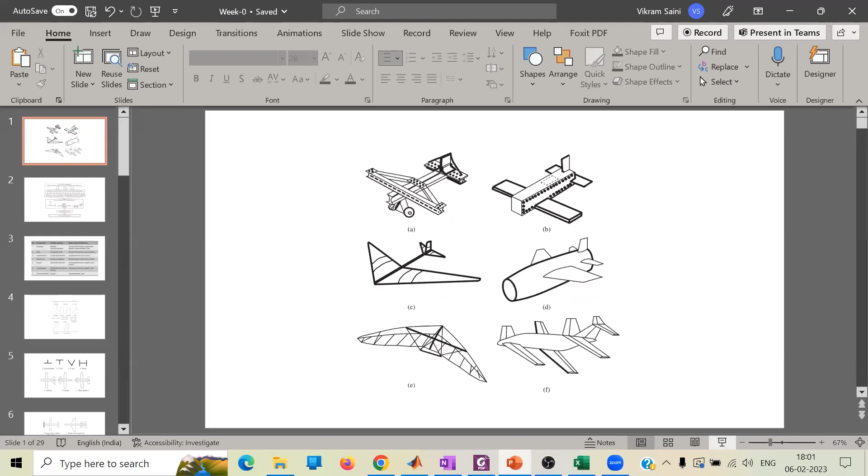So I think we should begin, we have enough people. All right, so you see 6 photographs, right? Now, can you tell me which aircraft was made by who? I mean, what is the main focus of a particular picture? Let's start thinking about picture A. Since it has to be an interactive session, I will ask you questions and you have to answer. Right, wrong, doesn't matter, because if you interact, you learn.

So any one of you, think about picture A. Who do you think made picture A, or the aircraft picture A?

Okay, so I'll give you some hint. There are multiple groups, let's say 6 groups. One is flight control group, aerodynamics group, propulsion group, manufacturing group, structural group, weight group. So now you have to choose which design is made by which group.

Let's begin with A again. Maybe structural. Okay, anybody else?

What's your name? Ripinder Singh, sir. Okay. And you are from? I'm from Amity University. Which one? Noida, Gurgaon, where? Noida. Noida. Great. And you will be surprised, I am also from Amity in my BTech. Oh, yeah, that's very nice. I'm also doing BTech in aerospace engineering here only.

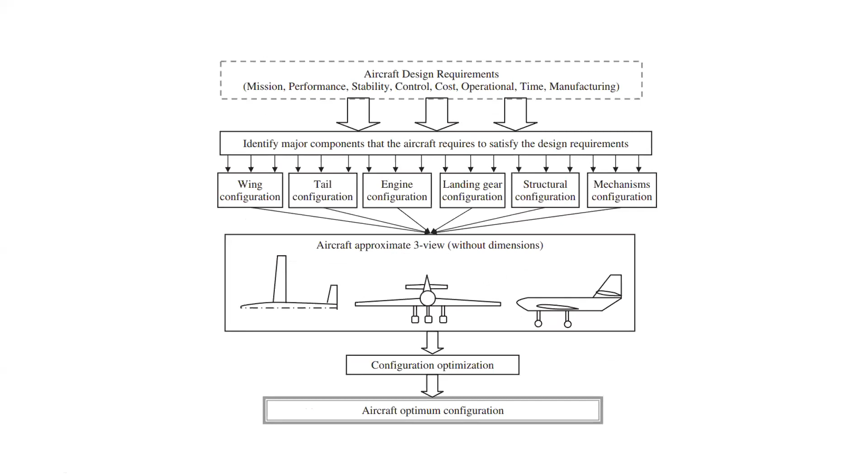This diagram gives you the sequence of how aircraft design happens. So what's the procedure? Your customer could be maybe an airline or maybe some government. They need some aircraft, so you are specified some requirements. You have a particular mission. You want this mission to have certain performance - your aircraft must have certain performance while executing this mission.

And I want to understand from you people, what is the performance of an aircraft? What do you care about in performance? You're free to answer, anyone. What do we mean by performance of an aircraft?

Basically efficiency and the power and transmission stuff. Power and transmission stuff - so you're more focused on the propulsion side, right? Yeah, correct. Right, anybody else?

Like about the mission profile - how much distance it can take off and land, how much loiter it can do, the cruising, maximizing endurance of the aircraft. Right.

So you said - I think this answer is more closer to what you will be learning in this course. In this course, performance of an aircraft actually means how fast you can climb, the climb rate of the aircraft, right? What is the range of the aircraft? What is the endurance of the aircraft? Okay, so these are the characteristics we care about in performance here.

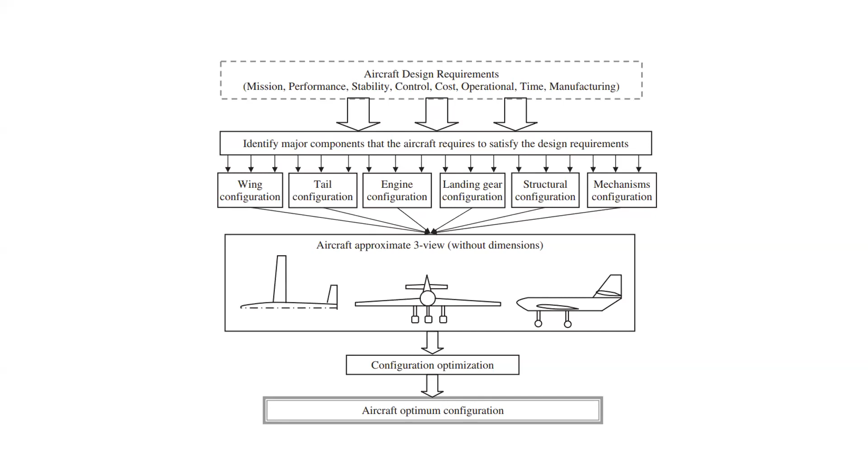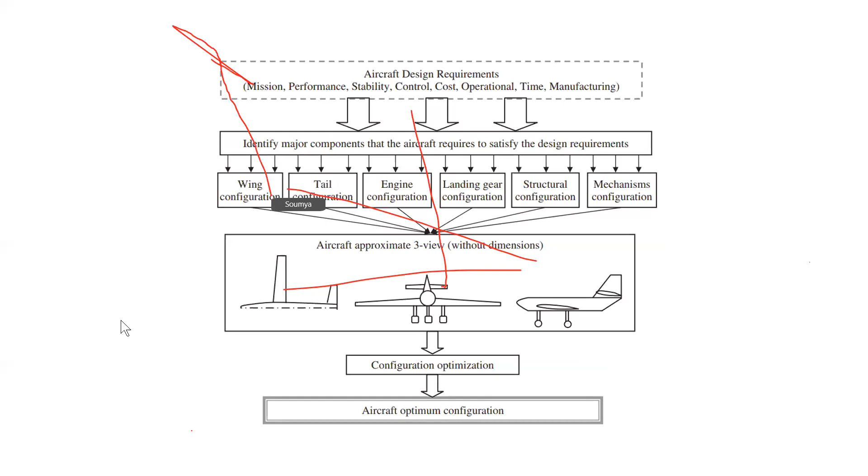We can see your name, Soumya. I mean...

So now you're allowed to write, but then you have to remove these things. Mistakenly written, sorry sir. You have to undo all of this, because this lecture is being recorded, it will go to YouTube. Yeah, we'll upload this, and I think you should undo all of what you did. You have an option in your Zoom, I believe. Please do it quickly, because time is passing and people will be unhappy when they see it. Yeah, someone has raised hand.

All right, so let's move ahead. I don't think he's able to do this.

Now, this is the next requirement we are given: the operational environment. What kind of operational environment will the aircraft be operating in? Let's say you want to make an aircraft for an aircraft carrier. So your aircraft sits on the aircraft carrier most of the time, experiencing more moisture because it's in the ocean. So you want the material properties to sustain that.

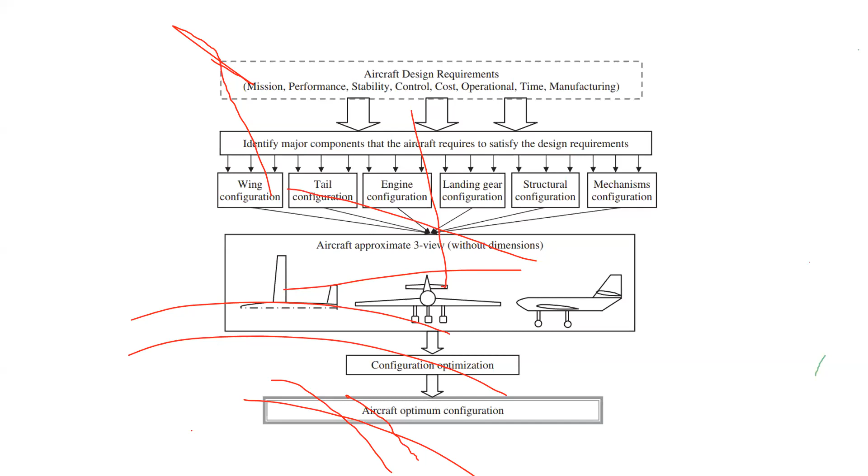So now we will move ahead to the next slide. Oh boy, I think you guys have to remove these things because they will be on every slide. The one who did this can only erase it. Exactly, that's what I know. So Soumya, you have to undo whatever you did to this screen, because it will be for all the slides. That's not a good idea. Yes sir, I am trying, sir.

There's an option for undo, Soumya. Yes, sir.

Okay, so we can keep talking. Now, we must understand the functions of different components, because as a designer, you're choosing properties of those components. You should know their functions and the impact of different components on the properties of the aircraft. So we begin with the fuselage.

You cannot have an arbitrary size of the fuselage. You want the fuselage to have a certain size based on how much payload you want to accommodate. You cannot choose very large, you cannot choose very small. You want to choose it such that you can accommodate the payload available to you.

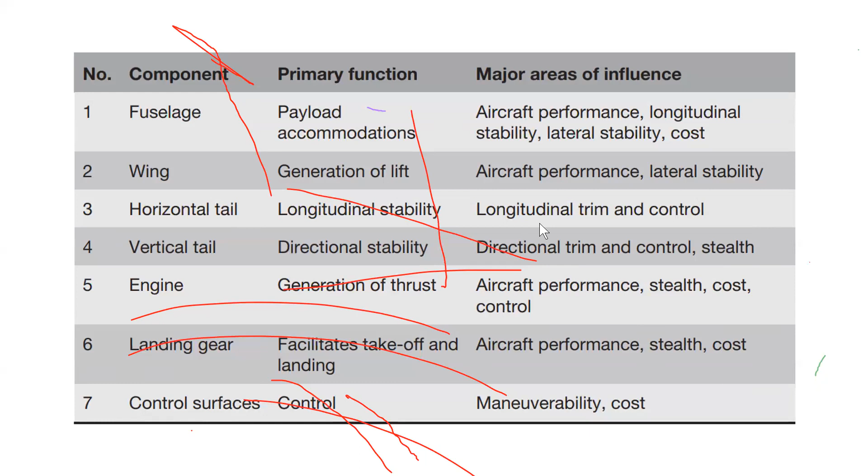During the course, Ghosh sir will teach you how high wing is useful, what are the disadvantages of mid wing, why you should not go with low wing in certain cases. I'll give you some very brief idea, not a detailed idea. You'll get these ideas throughout the course. My job is to introduce you to certain configurations.

Now let's look at the high wing. Can anybody tell me what is the advantage of a high wing? Any advantage? We'll talk about disadvantages also, but let's focus on some advantage of a high wing aircraft.

A student suggests it gives more stability. Yes, more stable, sir, it will make the aircraft more stable, right? Yes, sir. Okay, now you know, for a certain class of aircraft, the cargo aircraft...

When you load and unload cargo, your loading truck might need to move below the aircraft wing also. So for high wing aircraft, there won't be a collision between the wing and the loading truck. So there is an advantage for cargo aircraft, and you will find that most cargo aircraft are high wing. These kinds of advantages and disadvantages guide you on what kind of configuration you want to choose.

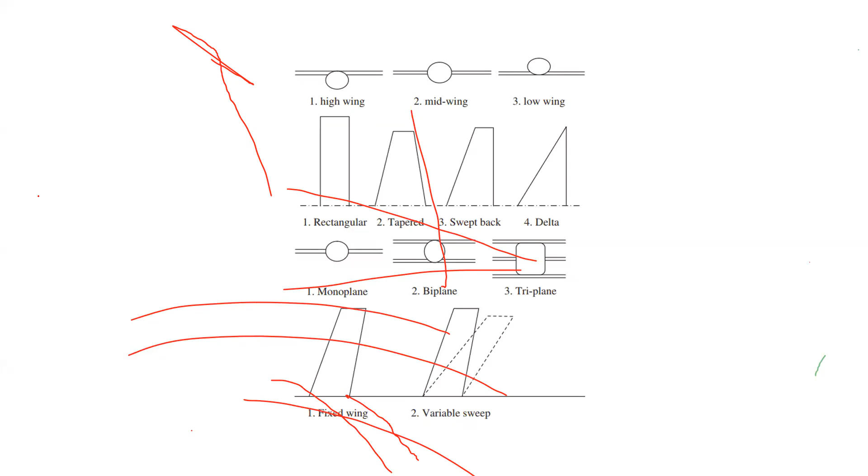The tapered wing can produce more lift compared to rectangular wings. Now, the aspect ratio formula is B squared divided by S. Tell me, how can a tapered wing have more aspect ratio for the same wingspan?

As we go from the root to the tip, the chord keeps decreasing, which will decrease the S and hence increase the aspect ratio. You can see this in the formula: for the tapered wing, you have less area for the same wingspan, and that's why you have more aspect ratio.

And if you have more aspect ratio, what are the advantages of that? The tapered wing can produce more lift compared to rectangular wing. And why is that? Rohan is answering in the chat, and the answer is really good.

Less induced drag for the high aspect ratio, that's good. Another answer is shock formation: the swept back wing is used to avoid shock formation, and the same goes for the delta wing. You'll find that fighter aircraft flying close to supersonic or supersonic speeds have delta wings or swept back wings to avoid shock formation on the leading edge.

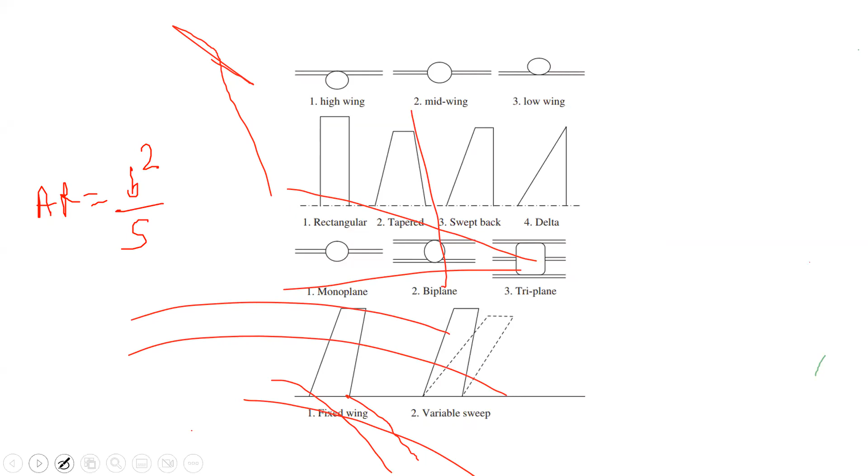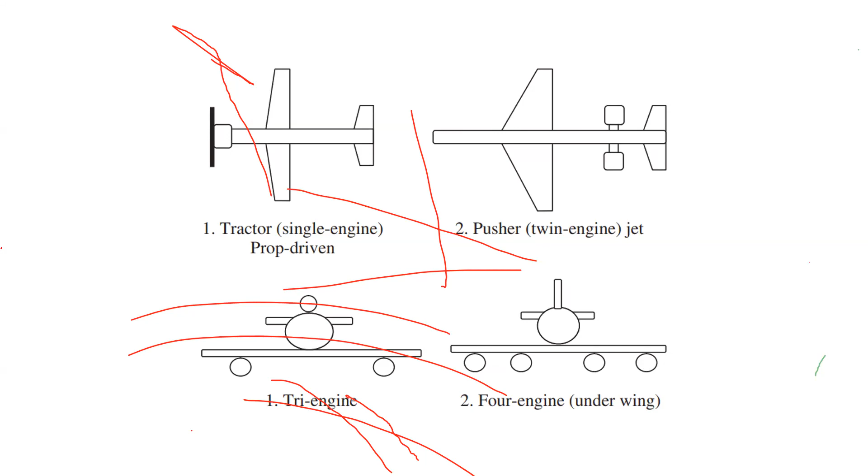This slide gives you where do you mount the engine. You have a tractor configuration, a pusher configuration, tri-engine, four-engine. Now the question is why would you go with one, which one? That's answered best by having a requirements table. As a student of aircraft design, your job is to understand various possibilities, and my job in showing these slides is exactly that - you should know the possibilities and their advantages and disadvantages. So these are different possibilities for us.

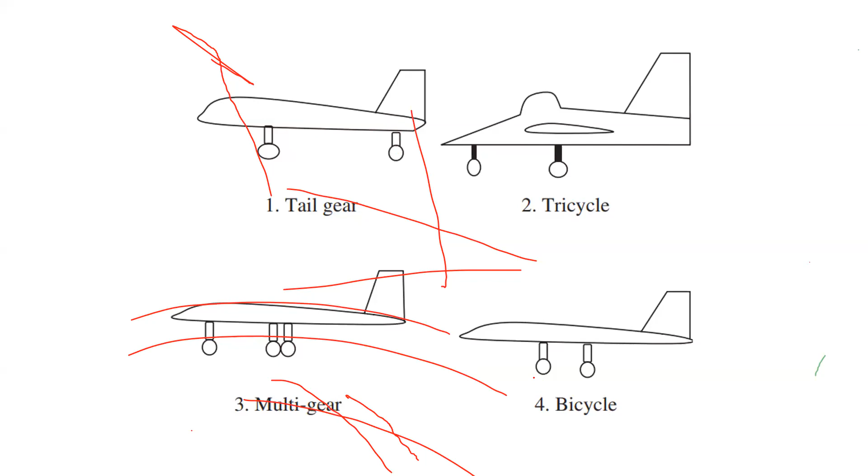There are possibilities for the landing gear. You can have a tail gear, where one of the wheels is right below the tail. It's a tricycle configuration usually in fighter aircraft. It's a multi-gear when the aircraft is very large. It's a bicycle configuration for lightweight aircraft.

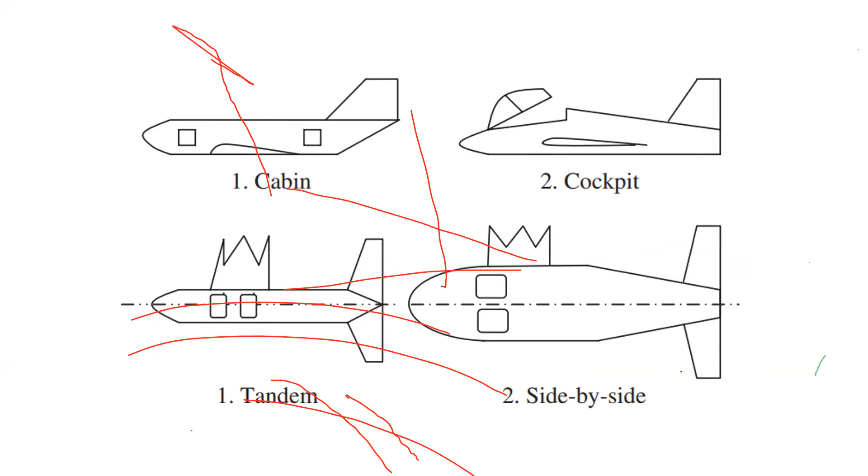Now, what is important to a designer? The designer could belong to military or large civil transport aircraft, small general aviation aircraft, or you're making something at home. So what is important to you? It drives your design decisions, right?

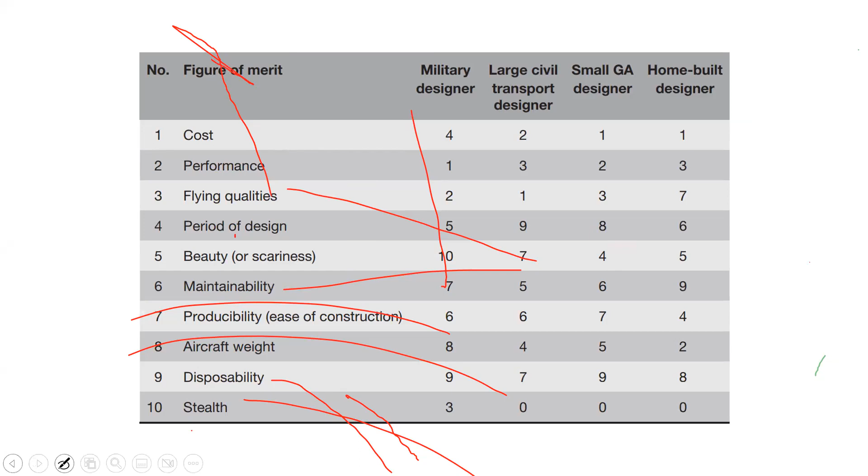This decision is driven by a figure of merit list. You make a list and make a decision on what you want in your aircraft. Let's move ahead.

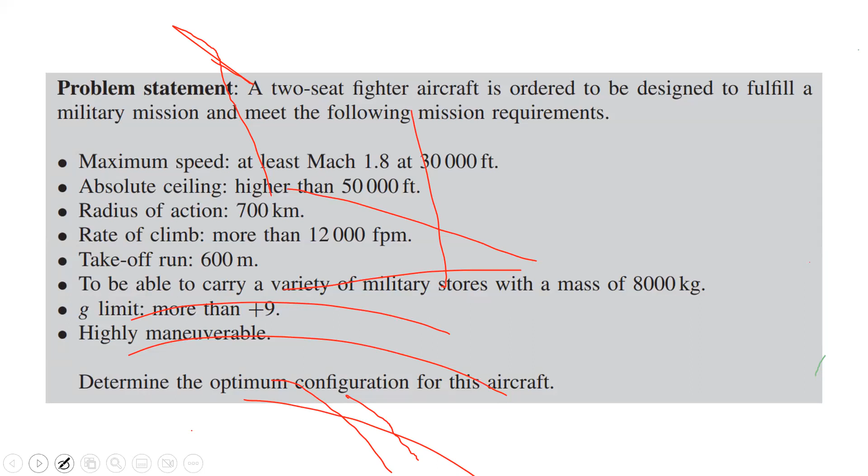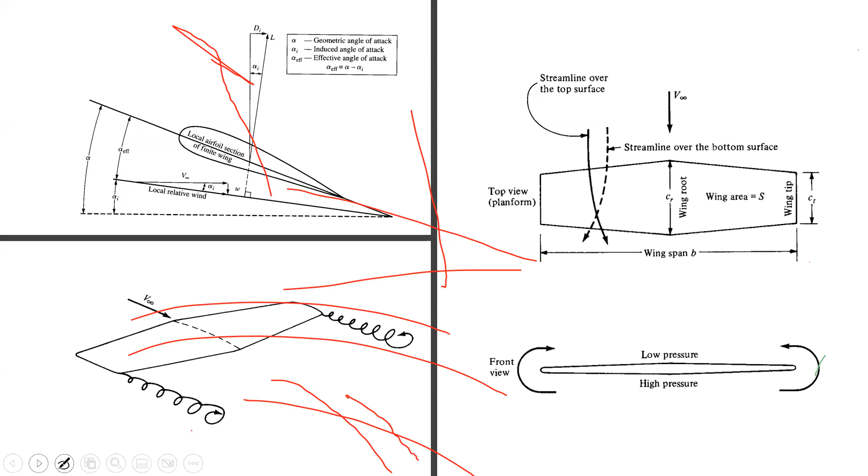Now, I'm not going to end here with this question. I need explanation. So what is an altimeter? You know the altimeter measures the altitude, but the question is, how does it function? How do you compute altitude from an altimeter?

Sir, I can tell about the old type of altimeters, how they work. Go ahead. So we have an opening which is in a pitot tube only, which measures the static pressure only. So as we go up in altitude, the static pressure decreases, which will show us how much altitude we have gained. Right. Basically, people in chat are saying atmospheric pressure, pressure difference in altitude.

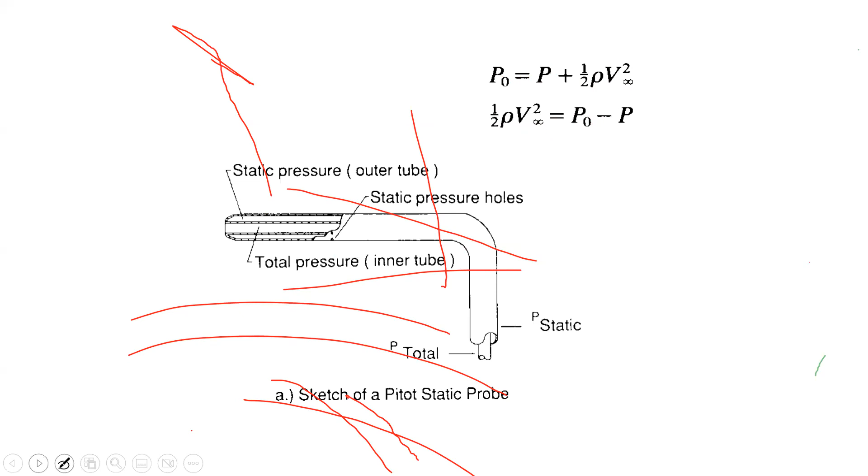Now, how about the altimeter? This is how the altimeter functions. The altimeter is a sensitive pressure transducer that measures the ambient static pressure and displays an altitude value on the instrument dial. The altimeter is calibrated using the standard atmosphere. You have to underline this: the altimeter is calibrated using the standard atmosphere.

Now, when you come back to this equation, your aim is to find out H. And what do we mean by calibration here? To find out an H1 and a T1. So when the aircraft is on the ground, you are at a certain height from sea level, so that is your H1. Before taking off the aircraft, depending on what kind of area you are in, you have to find out the T at a certain height H. That's how you calibrate it.

Then, since you are sitting in the aircraft, you know the current pressure, the static pressure. So by taking logarithm of this equation, you come down from the exponential and you can compute H. So this is how the altimeter gives the altitude.

And just for your curiosity, how do you derive this equation? Anybody have any answer? How do you derive this equation? Okay, that's an exercise you should go ahead and do to find out this equation. The only hint I will give you is that you find out the pressure gradient. You make a column of the air, then take a height differential dH, and corresponding to that, compute a dP, and then perform the integration on that equation. So you will end up with this equation.

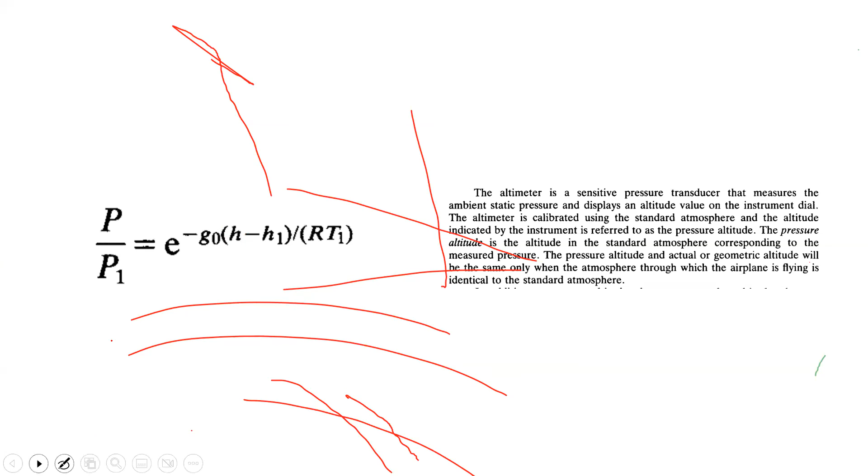All right, the next question is: weight is given for the aircraft, lift to drag ratio is also given, speed of the aircraft is given, and they're asking us to compute the power in kilowatts. I expect that you guys perform this question right now, sitting at your home. Just bring your calculator and start computing it. I'll go to the next question when I see answers in the chat. Go ahead and do the calculations, I'll wait for answers. I'm looking at the chat and let's see who answers first.

Rohan has answered 32.7, almost every question. Rohan, where are you from? I'm from Bangalore. And what are you studying? Actually, I am a pilot, so I probably know many of these things. So you're doing your BTech, or just studying this course for curiosity? Just for curiosity. Nice to meet you, Rohan. You're answering almost every question, so I'm impressed with that.

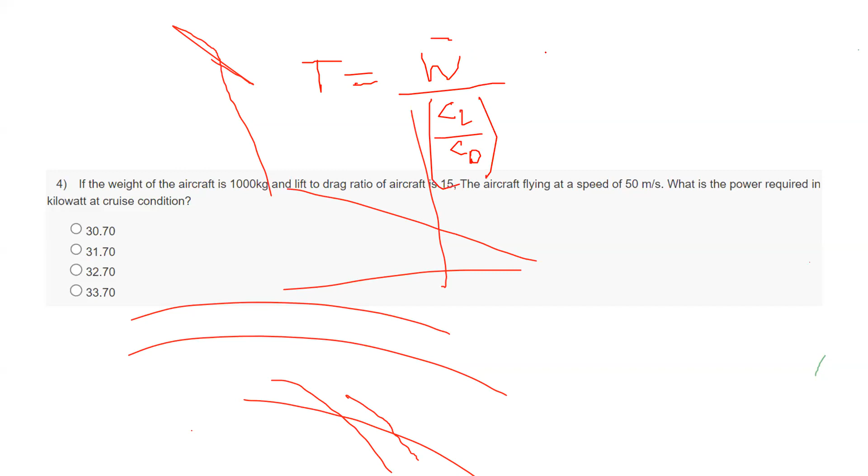So you find out the thrust. You first compute the weight of the aircraft and divide it with the ratio of CL over CD. This ratio is given to you, and the weight of the aircraft is basically: you have 1000 kilogram of aircraft and 9.8 is the G. You divide it with 15, that's your weight, and multiply this number with the velocity, because T times V infinity, this is your power. Multiply this with 50, and since you need the power in kilowatts, you divide, and it is 32.7. So the correct answer is 32.7, and this is the procedure. Power is velocity times the thrust. This is how you compute the thrust, and this is the calculation shown here. I think we are good to go ahead.

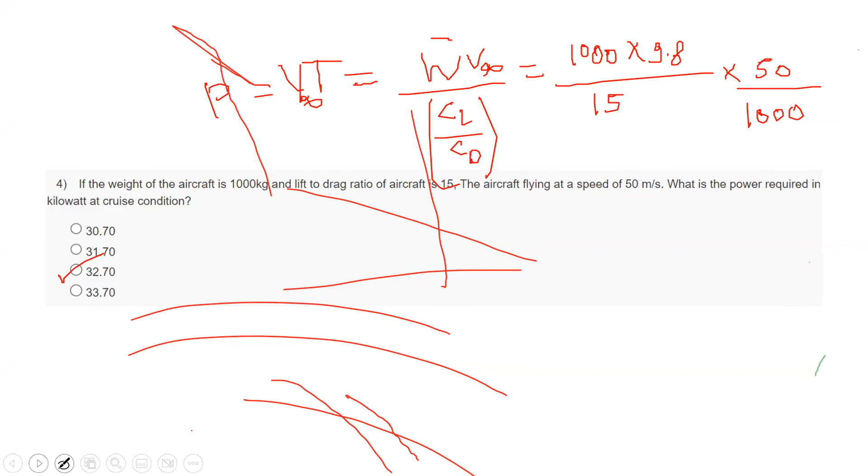Next question: the stability producing component for aircraft is? Aircraft tail. Yes, people are saying tail. Yes, it's tail.

To everybody who has answered tail, I want you to speak why not wing. You have to give me any reason, otherwise I won't accept the answer. Why not wing? It's mainly lift producing.

Akhileshwar Munisi is saying it's mainly lift producing. So does that mean it cannot have any effect on stability? Does it have a stabilizing impact or destabilizing impact on the overall roll stability? Wing has an impact on roll stability, that's guaranteed. But it has an impact on longitudinal stability also.

No. Ailerons are for roll control, not stability. Stability is different from control, you will understand this in detail sometime later. Akhileshwar has answered it has ailerons for roll stability - no, that's not the correct answer. Ailerons are to control the roll angle, not to provide the roll stability. Stability is a different concept from control, and you have to understand it very fundamentally.

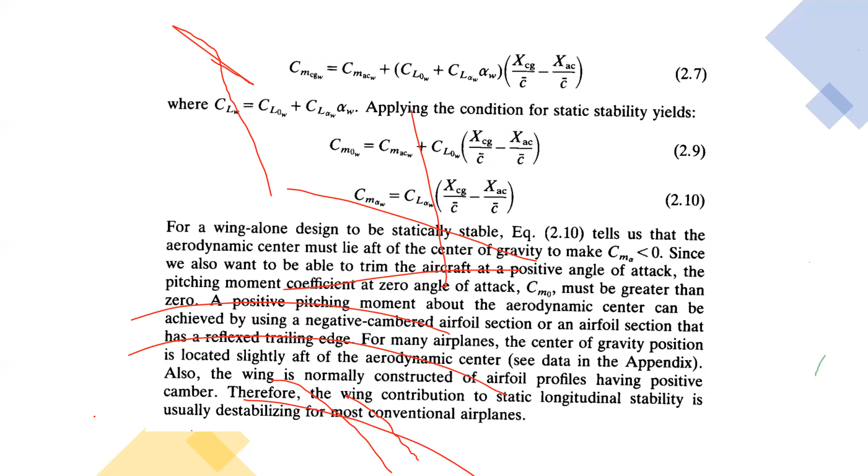So that's the full answer. Why not wing? You can have a wing-alone configuration that is also stable, but for that you need some arrangement with respect to the airfoil that you choose.

And this is the contribution of the tail, right? So Cm naught is positive for the tail in equation 2.27. All you have to do is arrange the tail setting angle IT, right? Because it's minus here, so you can reduce it as far as possible. IT, you make it close to 0, then the whole thing is positive. VH is horizontal tail volume ratio - you'll see the definitions of these quantities later on.

And Cm alpha contribution from the tail is also negative, so tail is a stabilizing component here. Since I'm showing you quantities you might not have heard of, don't bother - I'm just giving you some philosophical ideas here. All of these calculations you will perform later on in the course. So if you have not gone through a flight stability course, don't bother much, just hear what we're discussing.

Which book is this from? It's from Nelson, Robert C. Nelson. The book's name is Flight Stability and Control of, I think, Airplanes. You just Google Robert C. Nelson, I'll type it in the chat.

Let me type it, it's a good book. I recommend all of you study this book before you come to this course, because here Ghosh sir won't be teaching you the fundamentals - you have to know the fundamentals already. He will teach you the design philosophy, that's different. He'll directly start speaking about connections between, like if you change this, this happens, but you have no idea why that is true. So it's your duty to go through an aircraft performance course or flight stability course - both of those courses are a must for you to perform really good in this course.

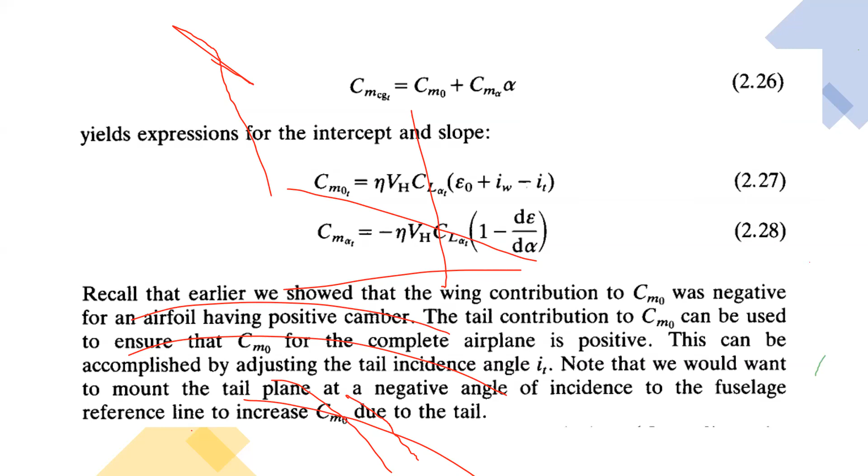Okay, so we now move ahead. If the weight of the aircraft is given and lift to drag ratio is given, thrust required has been asked. We have already done this question - when we computed the power, we computed thrust also. So this question is straightforward, everybody can answer, so nobody is left. I will move ahead directly without explaining anything here, and you can compute which one is the answer - I won't tell.

Okay, if aircraft is in static equilibrium, it means what? Are controls set to 0? Are controls not set to 0? May or may not be set to 0. None of these.

Somebody has answered something - A, controls are set to 0. Rohan is saying, I think it is sir, C, or may not be set to 0. Some people are saying C, some people are saying A. So there is a conflict - it could be A, it could be C. So I want to hear first from the group which has answered A. People who are thinking the answer is A, please go ahead and give us the explanation - why do you think so?

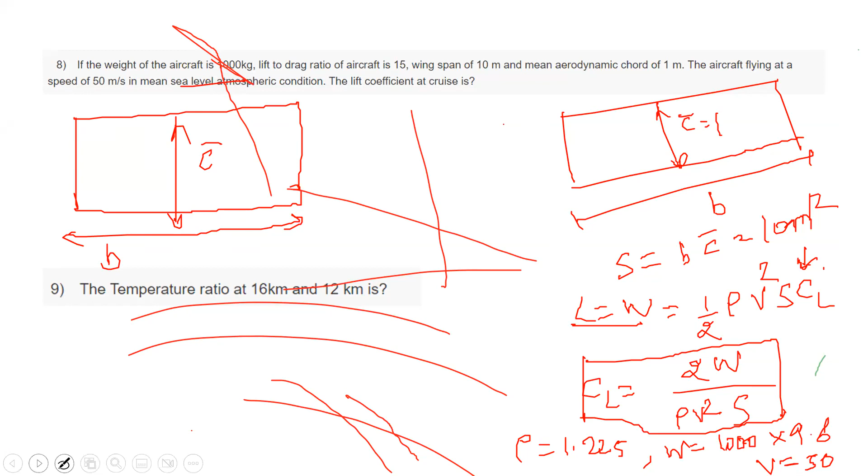Yeah, you read the question and answer. I'm looking at the chat, and then we'll discuss when everybody answers.

Akhileshwar has said 1, greater than 1. Yes, it should be greater than 1. Should be greater than 1.

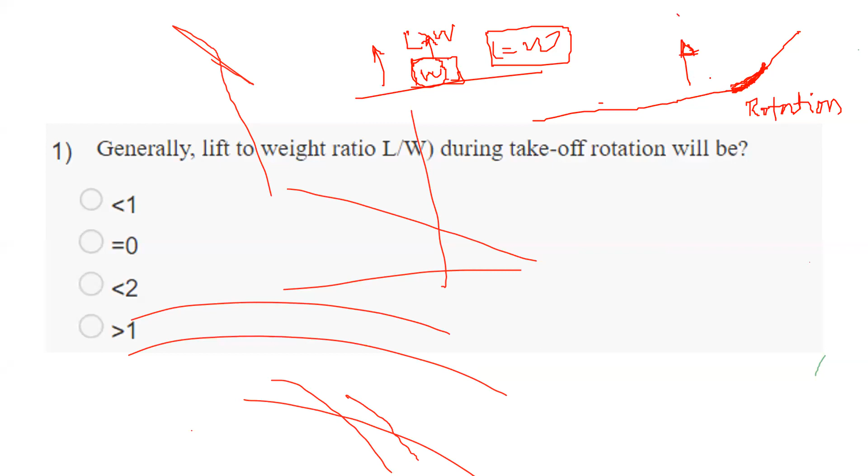You have to supply a lift force greater than W. That's how you accelerate upwards. Now, when the aircraft is climbing, it's definitely in an upward acceleration. It's going upward, right? It's going horizontally forward also, but it's going upward. There is a climb involved, so there is an acceleration involved in the upward direction. Therefore, lift is greater than weight during this rotation, and that's why the answer is D. Okay, sir, clarified.

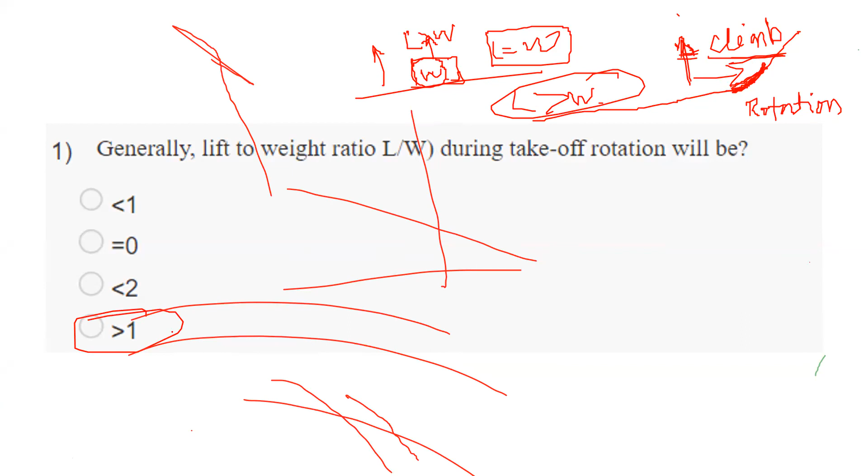Next question is this. So it's a big question. Note down the data. Everything, note down in your notebook because there are questions 2 to 6. They're based on this data. So you can refer to it in your notebook. Just write down, first information you have to write down is the value of the CD.

Then lift curve slope of the wing is 0.1 per degree. And zero lift angle is -1 degree, which means it's a cambered airfoil in the wing that you're using, and stall angle is 17 degree. All right, just write down this information in your notebook so that you can directly refer to it. I don't have to change the slides for that. All right, if you have written it, now we come to the question.

The lift to drag ratio, also called aerodynamic efficiency, at minimum power condition will be what? So they're asking, what will be the lift to drag ratio at minimum power, minimum P? That is the question. I'll first wait for everybody, and then if you don't answer, I'll answer.

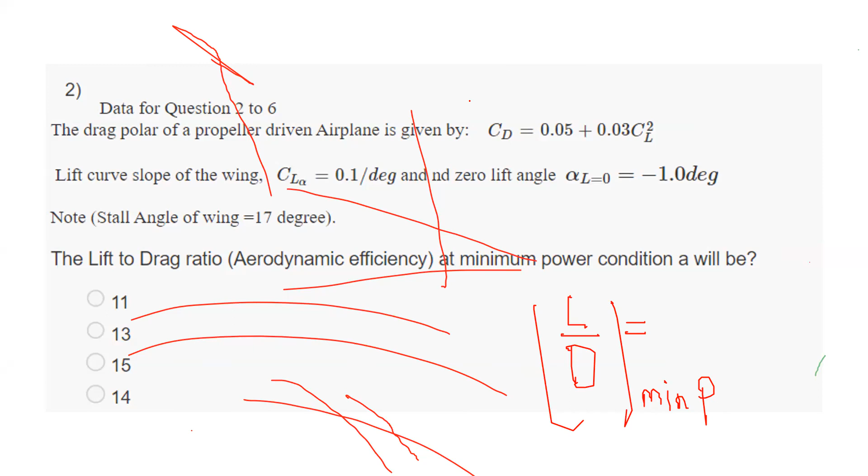Yeah, this is correct, man. Why didn't you tell us earlier?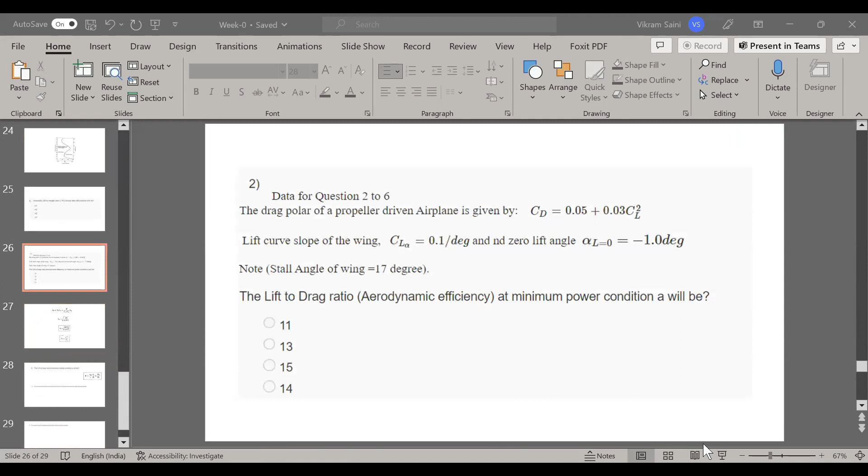Yes sir, now I got it. Sir, it's 11, coming out 11. Yes, it's 11, it has to be 11. Can you see the lines are not there anymore, right? Yes sir, the lines are not there now, they have gone. We should have done it earlier. No problem, from next time we'll be careful.

Anybody who has not got the answer, like who is confused about how the calculations will be done? Sir, me. Yeah, for you, we'll solve the question.

So the number one question you should be asking is, what is the minimum power condition? For that, you need the formula for power. Power is computed like this - this is thrust, this is velocity. Thrust is computed from the weight and this CL over CD ratio multiplied by velocity. Then velocity is computed from the formula for lift and weight. You substitute velocity here, you get the required power like this, and you find out...

This is... I think there is some mistake here. Yeah, it's fine, it's fine. So required power is proportional to this number. So if you want to minimize power, you have to minimize this number, CL to the power 3 by 2 over CD. Now, how can you do that?

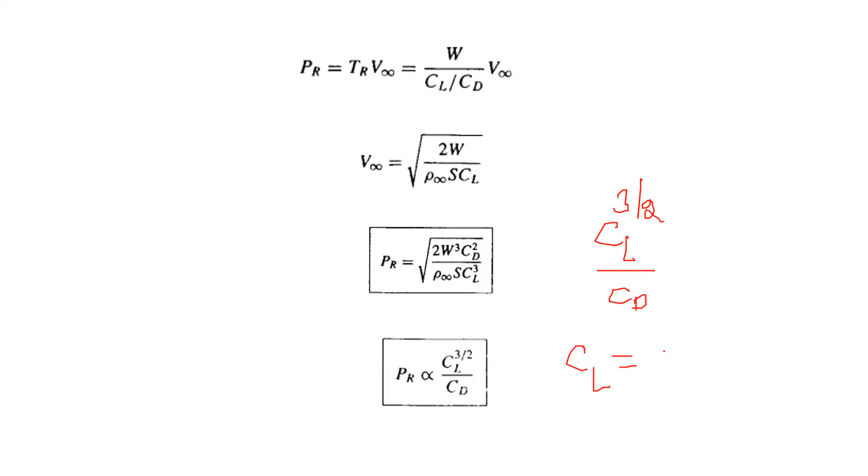How can you do that? Your job is to minimize this number. This is the number, and what you already know is this: CD is given as CD naught plus some K CL square. CD naught and K have some values, right? So you will try to find out the ratio of CL over CD. This is CD.

Sir, for minimum power, CD naught is CD upon 4. I'm going from the basics, okay? For people who have not taken the performance course, you might have known this number directly - if you minimize this number, then CL will be something like 3 CD naught divided by some K. You have both values, CD naught and K. CD naught is basically 0.05, and this is 0.03. You could substitute, but for people who don't know where it came from, I'm doing this derivation.

So what you have is the drag polar, and you compute this number, raise it to a power, then you differentiate it with respect to CL and make it 0. You will end up with this solution: CL is equal to the square root of 3 CD naught over K. For that CL value, when you solve for CD, you will find out how much the CD is, 4 CD naught. And then you can find out the ratio of CL over CD - that's how you solve this problem.

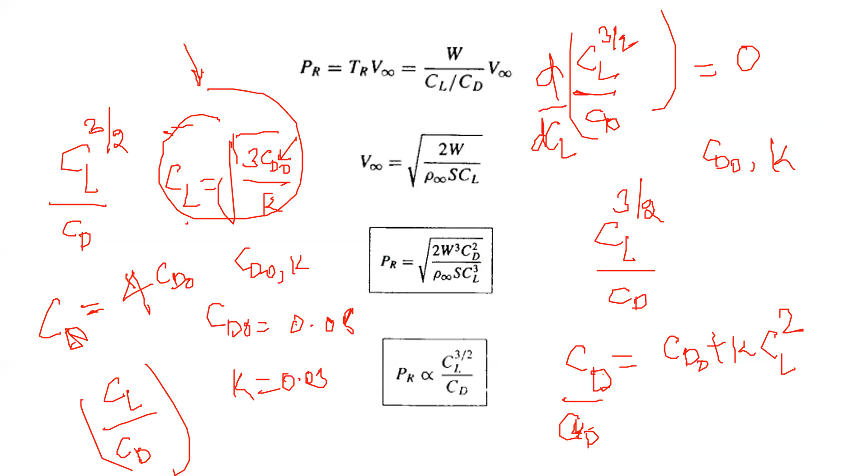All right, so the lift to drag ratio at maximum range will be - again, go ahead and compute. This time I have given you the range formula also, so all you have to do is maximize CL by CD.

So it's around 13, should be around 13, I believe. Let's see who else does. Akshay has answered 13.

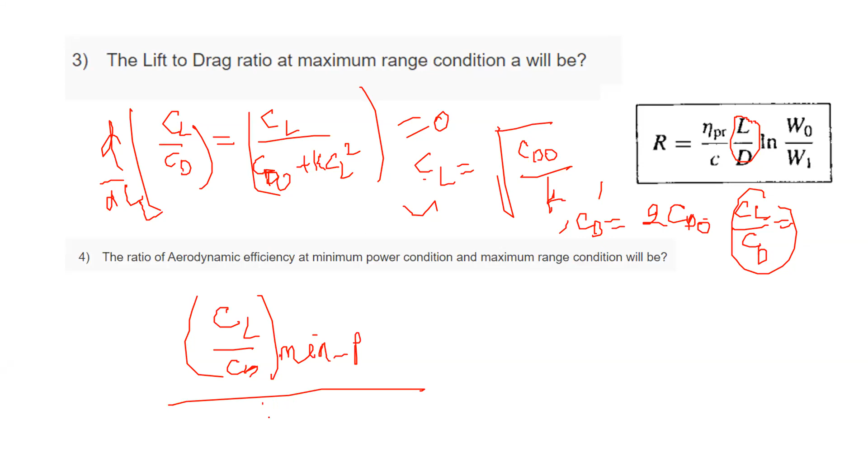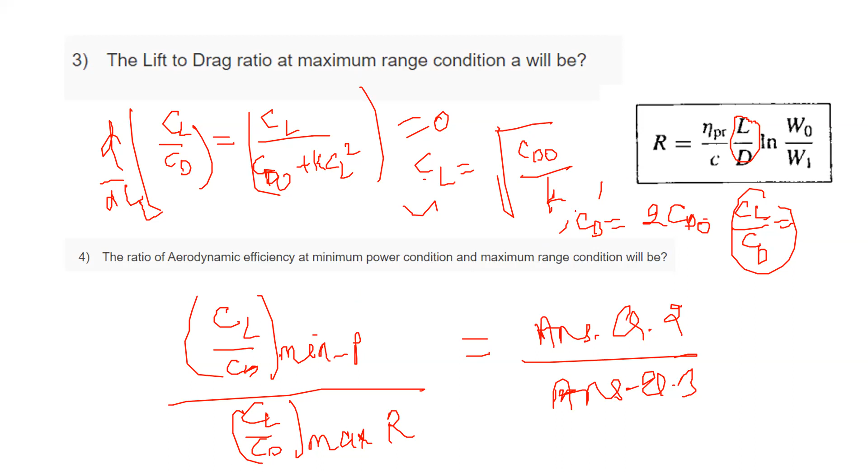The next question is to find the angle of attack for the maximum range condition. From question 2, you should know CL, and based on that CL, try to compute the angle of attack. I won't tell you the formula, I'll wait for your answers. I've just given you the hint that you should know the answer of question 2, CL.

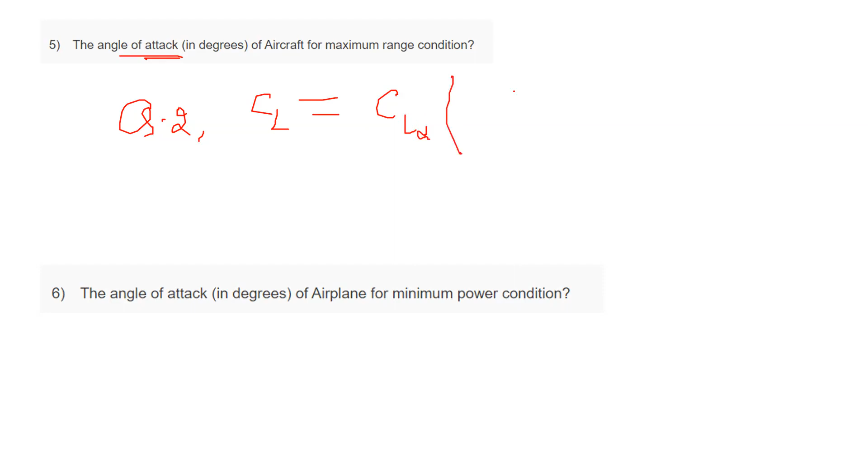How do we write the CL equation? We can write it as CL alpha, the lift curve slope, times some angle alpha minus some angle alpha L equal to 0. That's how we compute it. The slope is given, you have to find the unknown angle, which is minus 1 degree. And the CL you computed in the previous question, number 2. Same for question 3 - you know CL, you know CL alpha, alpha minus alpha L equal to 0, and that's how you find the angle for minimum power condition and maximum range condition.

Maybe I have swapped the questions, maybe it's 3 and it's 2, I don't know. Yes sir, yeah. Looks like it's 12.9 for the question. 12.9.

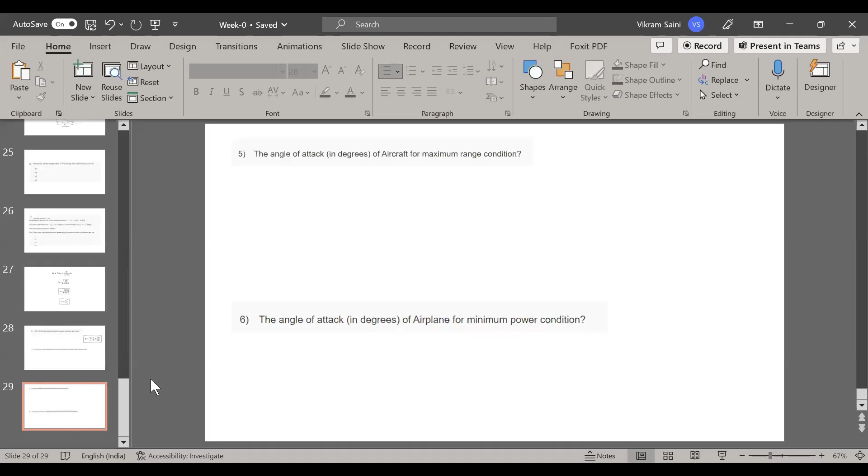Sir, may you please explain this again? What - may you please explain this again, that previous question? Fifth or sixth question? So the fifth. Yeah, definitely.

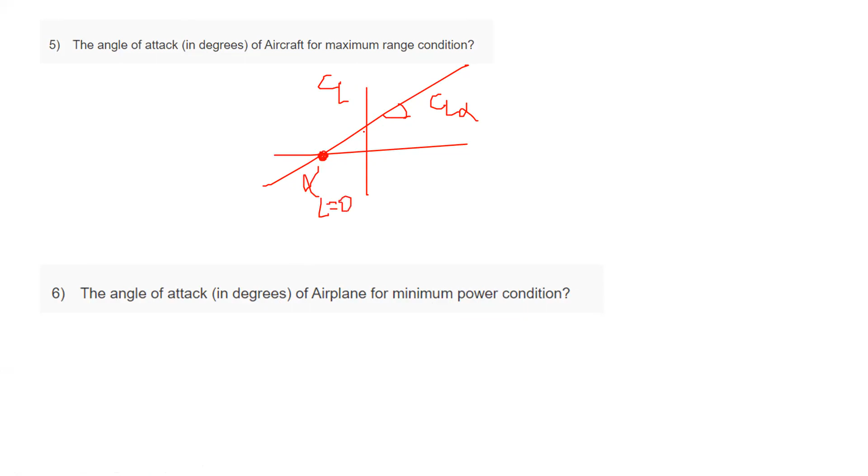So the idea is how do you write the equation of this line? It's CL. You know something called CL alpha, the slope of this, you know that, and one point on this line you know is this - this is the alpha L equal to 0 angle. And how do you find CL in terms of CL alpha and the current angle? Let's say this is some current alpha. So when you find the equation of this line, it is CL alpha times alpha minus alpha L equal to 0.

If you still don't understand, just expand it. You will find minus CL alpha times alpha L equal to 0. So this is kind of your intercept - this is your intercept of CL alpha into alpha. Usually the equation is CL equals CL naught plus CL alpha times alpha, and you don't know CL naught, so in a sense this quantity is CL naught.

So this is the short way of writing this answer directly. And if you want to understand it in the context of CL naught and CL alpha, then this is the answer. But since you don't know CL naught, you can find it out like this. Understood?

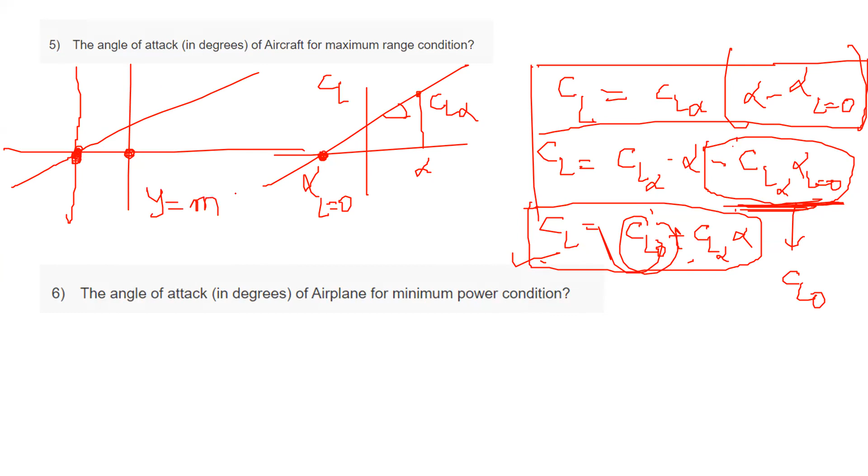Now, if I ask you, let's say this is the new origin. This was earlier origin, this is the new origin. So what is the equation of this line? Y is equal to mx. M is the slope, x is the quantity on x-axis, y is the quantity on the y-axis.

So what will be? CL is equal to some slope, CL alpha times the x. So what is your x? Now let's ask ourselves, this is the value that we're looking for. And this angle is represented from where? From here. Okay. And this is another angle.

Alpha L is equal to 0. So you basically add them both because it's minus negative. That's why you add them both. So you know that whole length. And that's how you find out alpha minus alpha L is equal to 0, because it was given as a negative number.

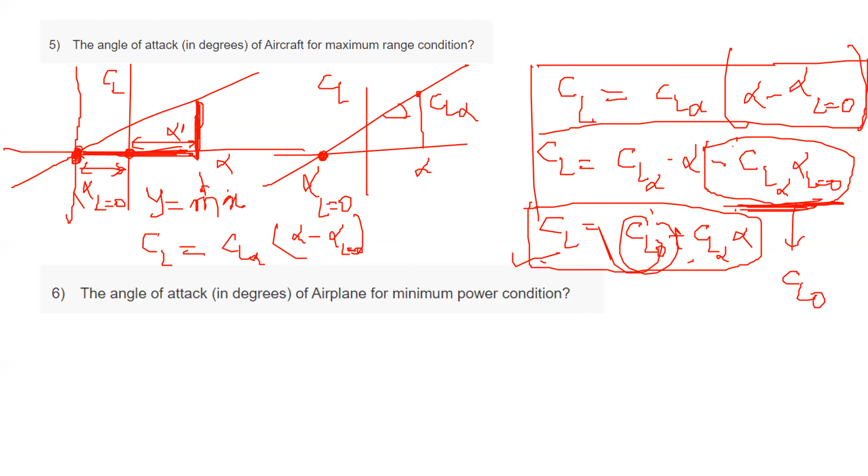Got it now? Yes, sir. So for both questions, same method, and probably you have got the answer, 11.9. The next question, and we are also probably done with the assignment.

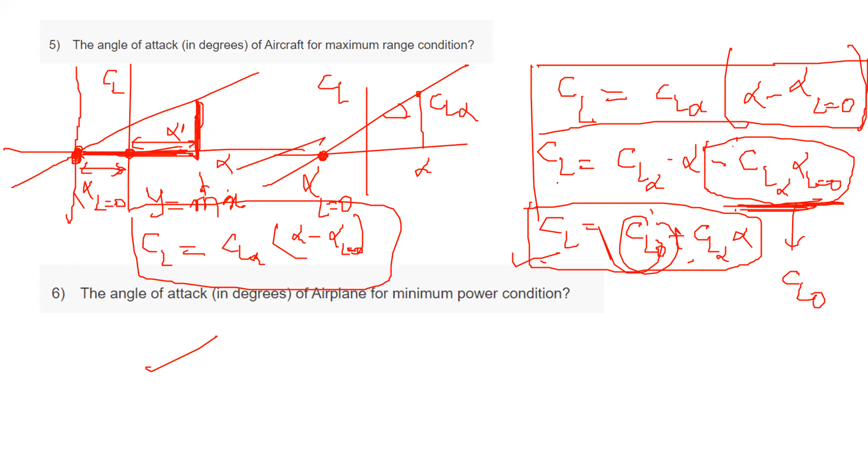Not at a certain angle. Oh, okay, let's take this question. I'll stop sharing and I'll share another screen. Wait.

So he's asking why...

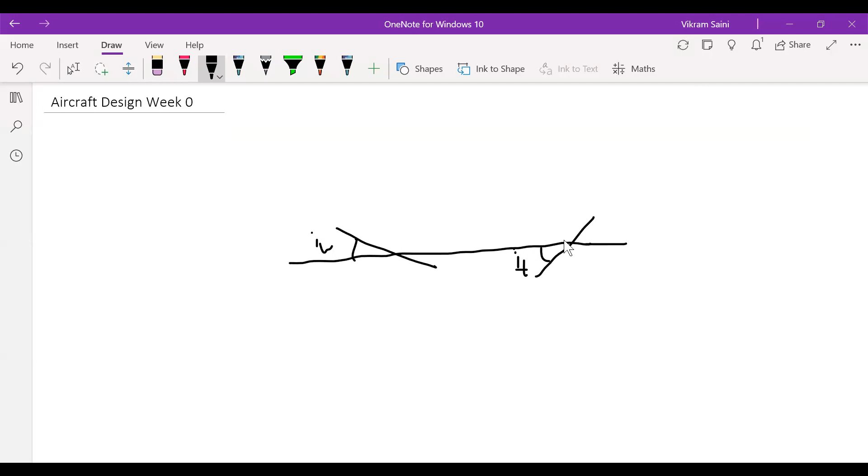Let's say this is the fuselage center line or the reference line. You can mount a wing at a certain wing setting angle IW, and you can mount a tail at some tail setting angle IT, maybe at a positive angle, I don't know, but for now I'm taking it at a negative angle. So this is your wing. If the wind is coming from here, this is your overall angle of attack, alpha. Your lift will be acting like that, and your drag will be acting like that.

Now tell me, what is your question again? Sir, I was asking why the wings are not placed at a certain angle. They're always placed at 90 degrees from the fuselage.

Okay, let me try to draw what you're asking. Let's say this is the fuselage. Are you saying they're mounted like this, or are you saying they're not mounted like this, or like this? Sir, I'm saying why they're always mounted perpendicular to the fuselage.

Why not? So what is perpendicular? Case 1, case 2, case 3 - which one is perpendicular? The first one. So, yes, first case. To your surprise, most airplanes are in configuration 2, not 1.

Most commercial airlines - they call it the dihedral angle, phi. So yes, it's a non-zero angle. It's the dihedral angle, and it's useful for roll stability. Someone is also saying no - yeah, definitely. Any other question?

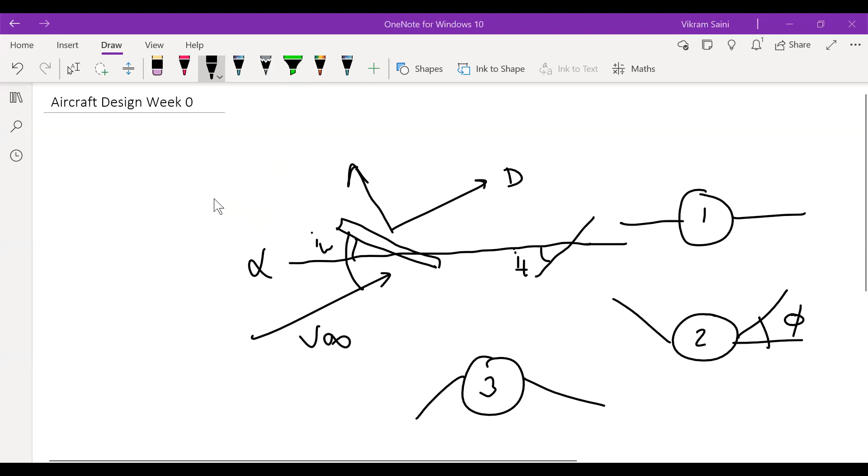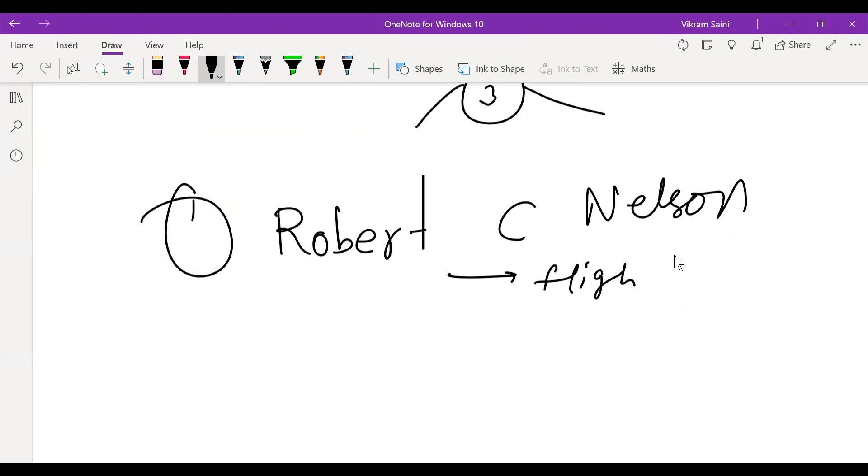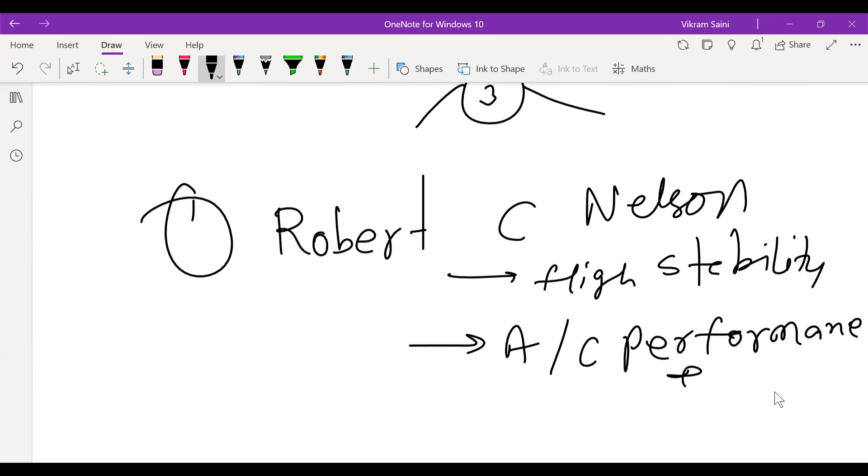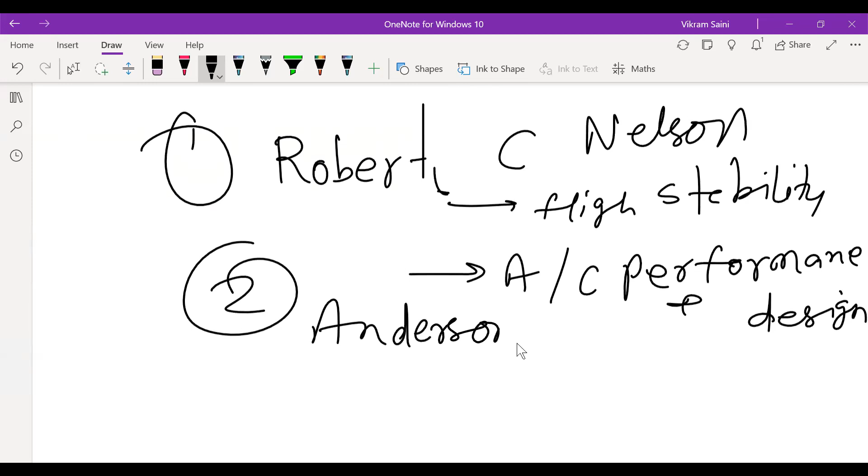Sir, I do have a doubt - this is my first class, I'm doing my 4th year in mechanical engineering right now. Sir, you said that before learning this course, I have to do another course related to these formulas we discussed. So are any books available, or recommended books for those courses, or is it available on NPTEL? There are books also - I'll recommend this book, Robert C. Nelson, he has a book on flight stability, and another book on aircraft performance and design - that's from Anderson. So there are 2 books, I suggest you go through both. Just write down these names in your notebook, search on Google, you'll find these books: Flight Stability, and Aircraft Performance and Design.

Someone is asking about CL required. From L equals W, for given W, dynamic pressure, and wing area - but how is CL available actually calculated using a wind tunnel for a given wing and surface area?

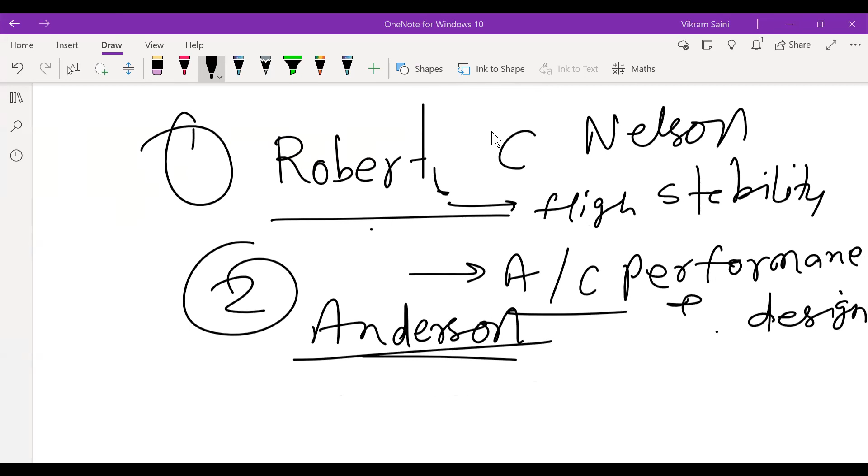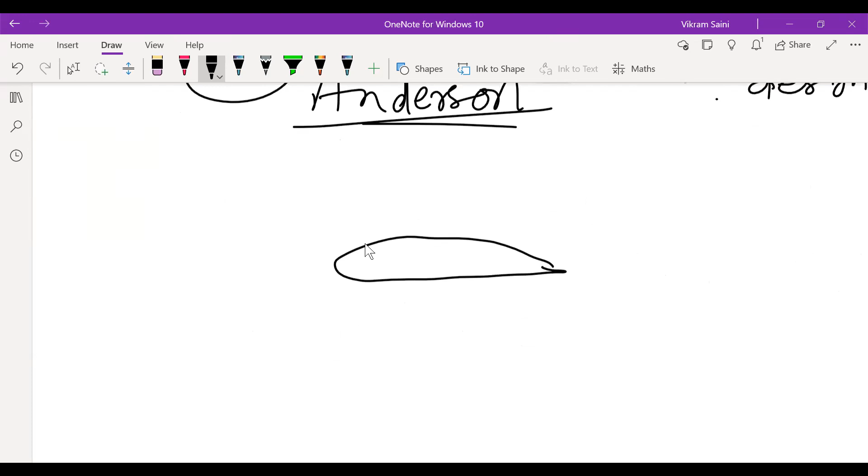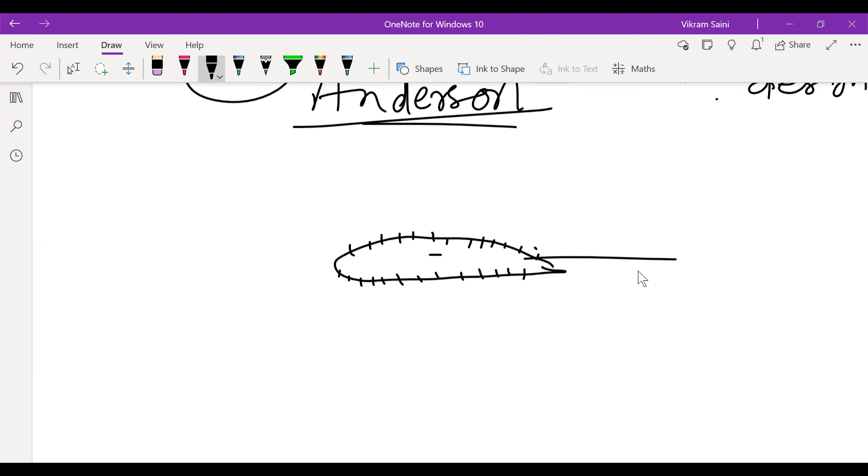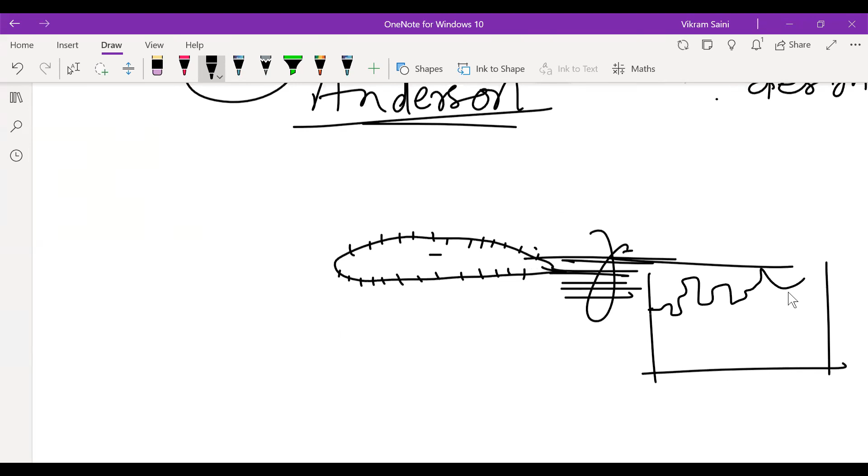That's done, that's a pretty standard thing to do actually. Let's say you have a wing - what you really do is put pressure taps everywhere: on the bottom surface, leading edge, trailing edge, everywhere. Now you have tons of tubes. Combine these tubes, set up a manometer like this. Now this manometer will give you the levels of pressure, something like this, and you have different tubes coming from different locations.

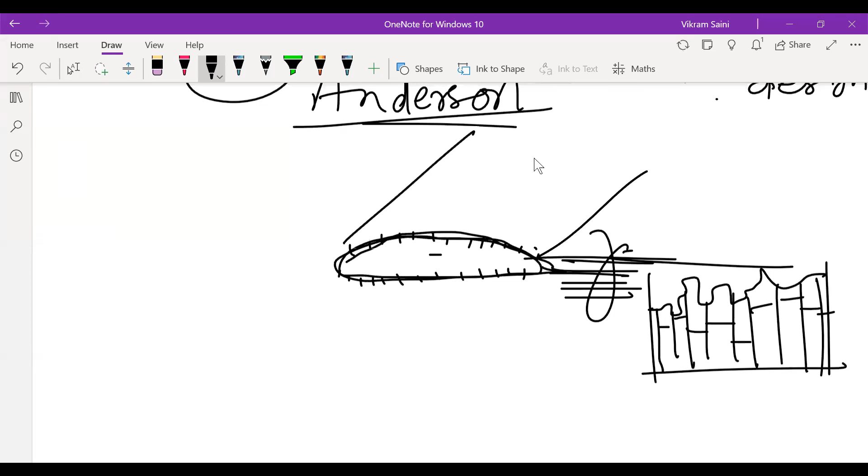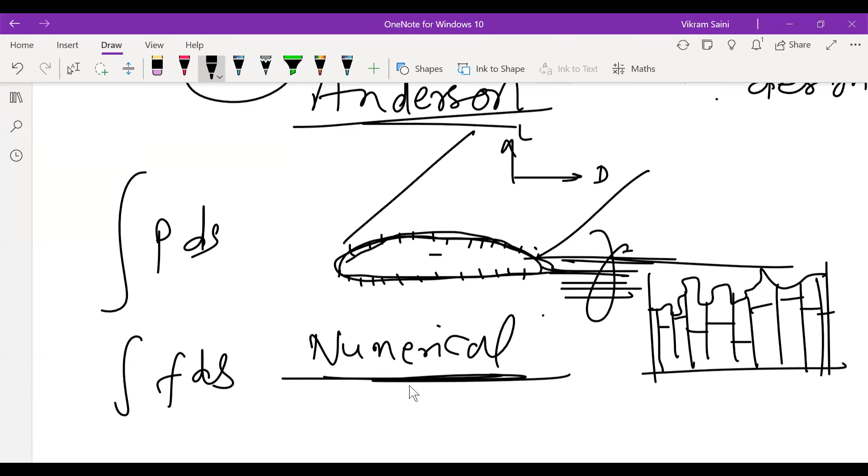These tubes will give you the levels of pressure, and we compute that pressure by rho g h. So you know the entire pressure distribution on the top surface and bottom surface. Then you simply perform integration over the wing - all you have to do is integrate pressure and skin friction over ds, find out the components of lift and drag. All you have to do is numerical integrations, because you only have data, you have tables, right? So you perform numerical integrations to find out the lift and drag in the wind tunnel. That's how you do the wind tunnel experiment.

Got it? Arun, Balaji?

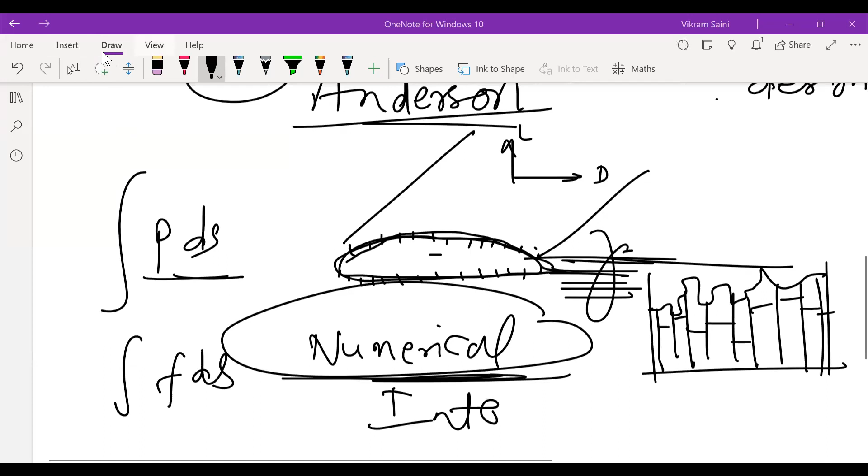Any other questions, guys? Sir, does this online class happen every Monday, or is it just designated for this Monday? Every Monday and Tuesday. Tomorrow my colleague will take this session. She will talk about similar things, with a different PPT than mine, but she will also solve similar questions. Because we teach independently, I teach some things, she teaches others, and the remaining things you see in the lectures of Professor Ghosh.

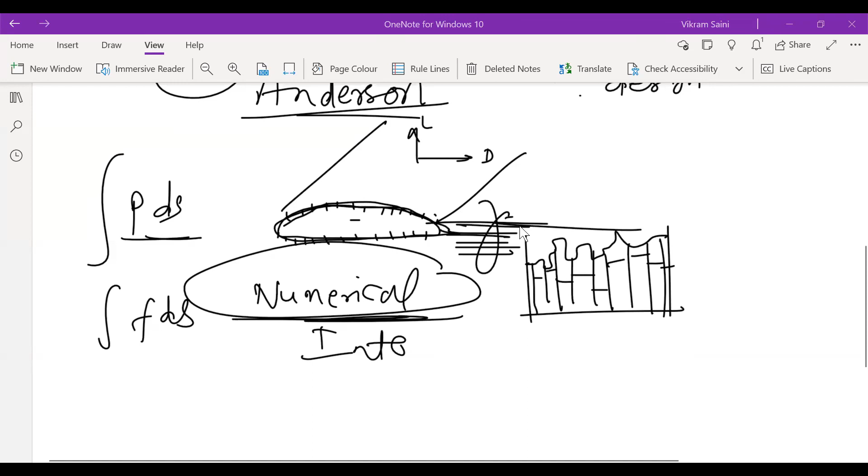Sir, will the links be same or different? She has a different channel, I have a different YouTube channel. I'm asking, for every Monday will we have different links? No, from the same link for this course. The link you joined today will be used throughout this course. But for Tuesday the link is different. For Monday there is one link, for Tuesday there is a different link. Only 2 links for the meetings.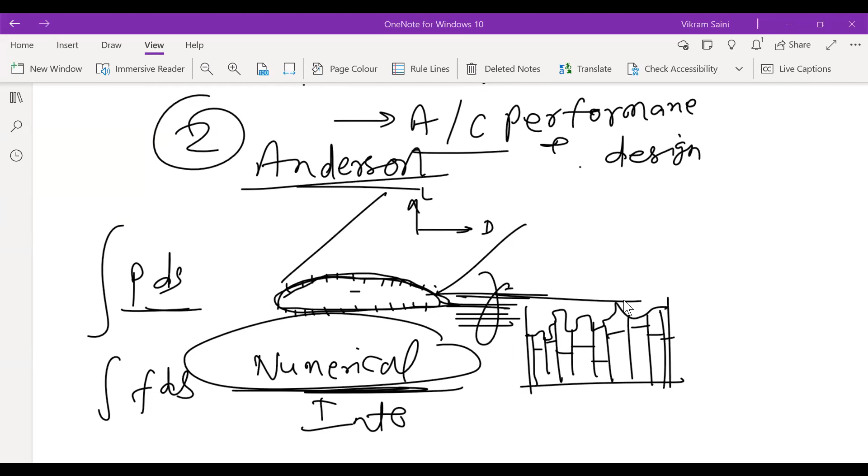Okay sir. Excuse me sir. Yeah. I cannot hear you, Suresh. No, you're not audible. You can write in the chat if you have any query.

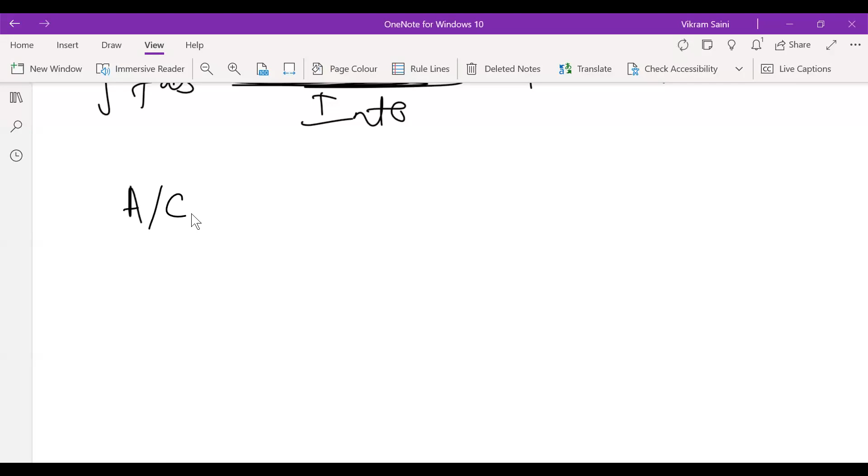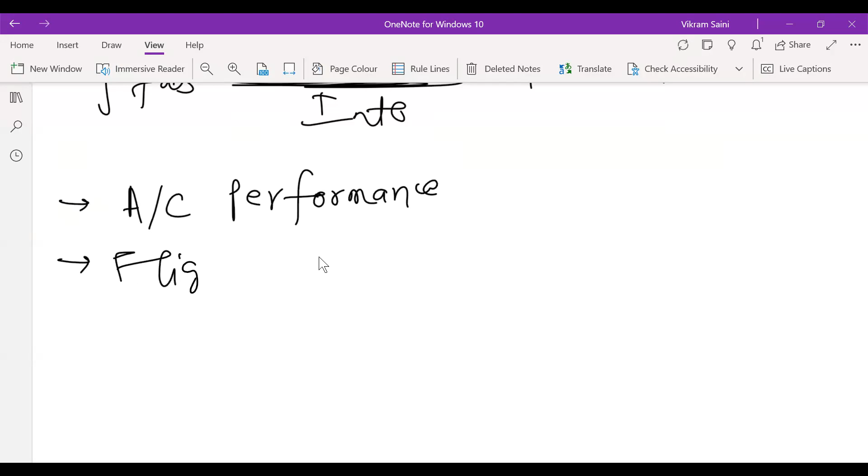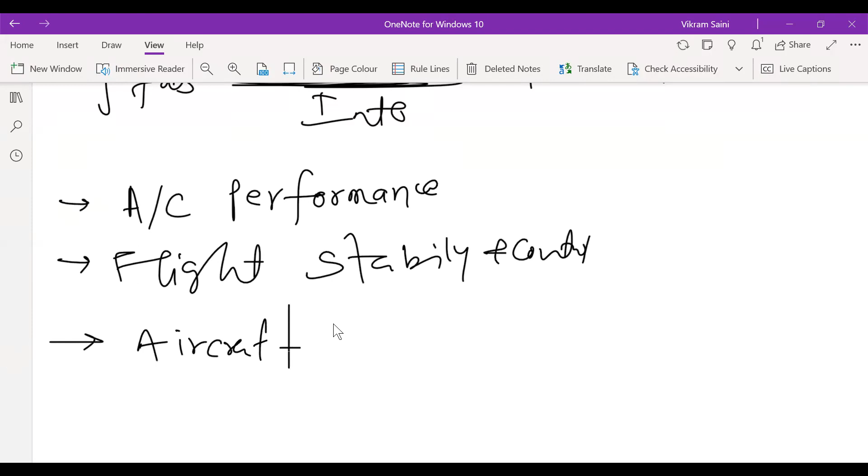Sir, I'm having a doubt about this entire flight mechanics course sequence, which course should we start from, sir? Because I started from the second course. You should start with aircraft performance, then go to flight stability and control, and then come to the aircraft design course. So it's the final course, it uses both the previous courses. You come to this course later.

Sir, are those 2 courses available right now on NPTEL? Ask again. Sir, are those 2 courses still available on NPTEL, sir? I think so, they are available on YouTube or the NPTEL website. Ghosh sir has taught both of these courses. Okay sir, thank you sir.

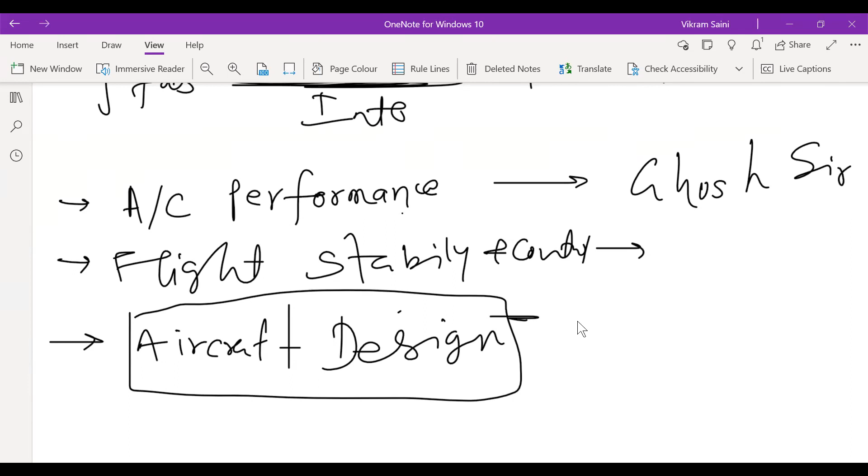I'm doing this course for the first time. There were many queries in daily lessons and assignments, which are the last 2 courses? I've told already, aircraft performance and flight stability and control. This is the 3rd course, its job is to use the previous 2 courses to design an aircraft. How is aircraft performance computed, how are stability properties calculated? They are taught in flight stability and aircraft performance courses. So it's your duty to watch the lectures of these two courses, then you will be able to appreciate the aircraft design course much better.

Okay, so I think no one is asking any doubt, we will end this session today. Someone is asking. Sir, can you give a rough idea on static margin? Just a brief.

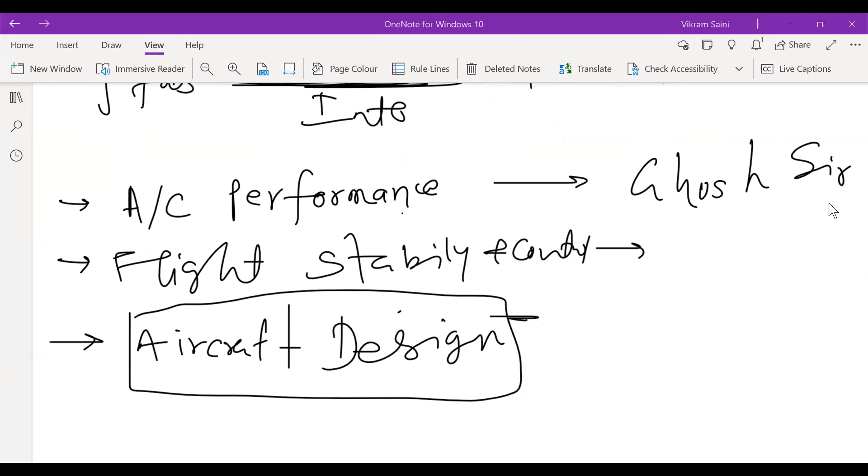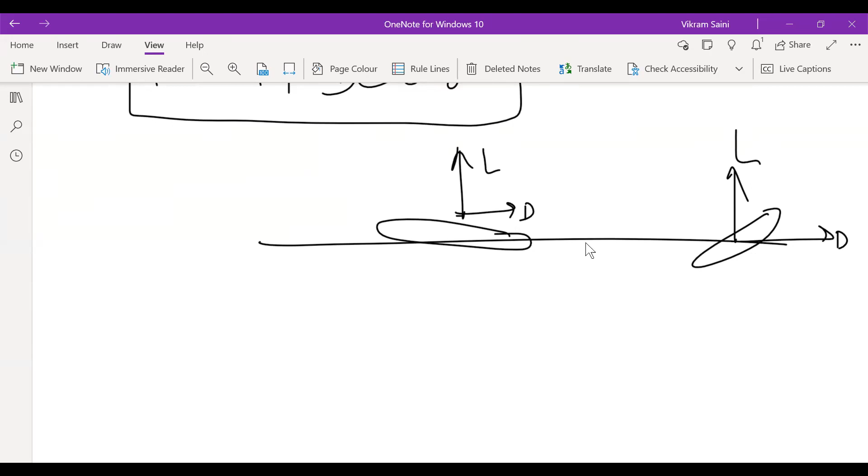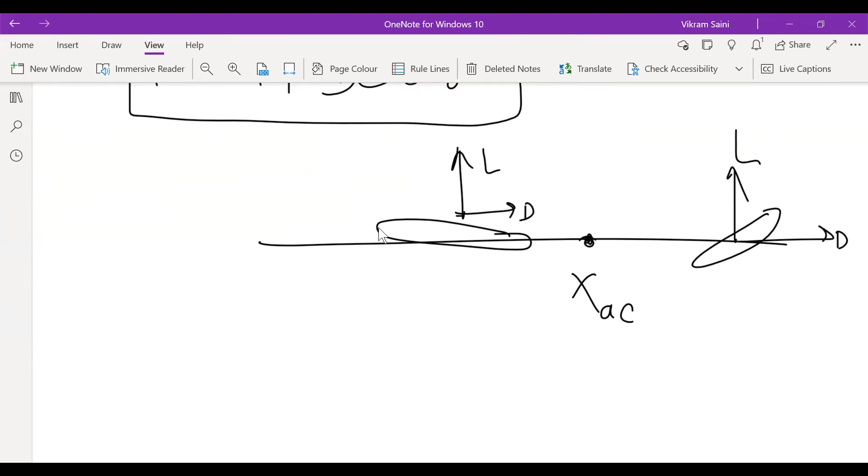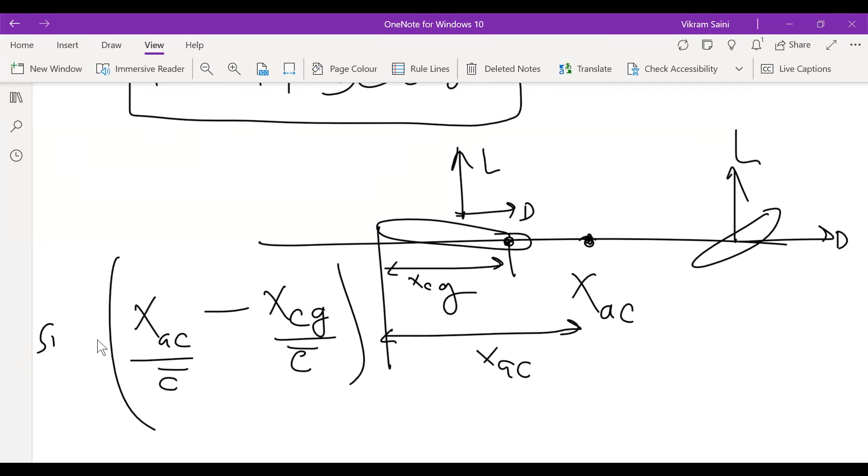Okay, so the rough idea is this. You have an aircraft, you have a wing, you have a tail, and it has certain lift and drag characteristics. Where will the net aerodynamic force act? There will be a point, let's say that is the point where the net aerodynamic force acts. We call it the aerodynamic center of the aircraft, also called the neutral point. This distance is measured from the leading edge of the wing, you call it XAC. Then the aircraft has weight, so somewhere its CG will be lying, let's say this is aircraft CG and its location is XCG. Now the difference between the locations of XAC and CG is usually measured as normalized by the mean aerodynamic chord. This number you usually call the static margin. For a good design it's between 10 to 15% of the mean aerodynamic chord.